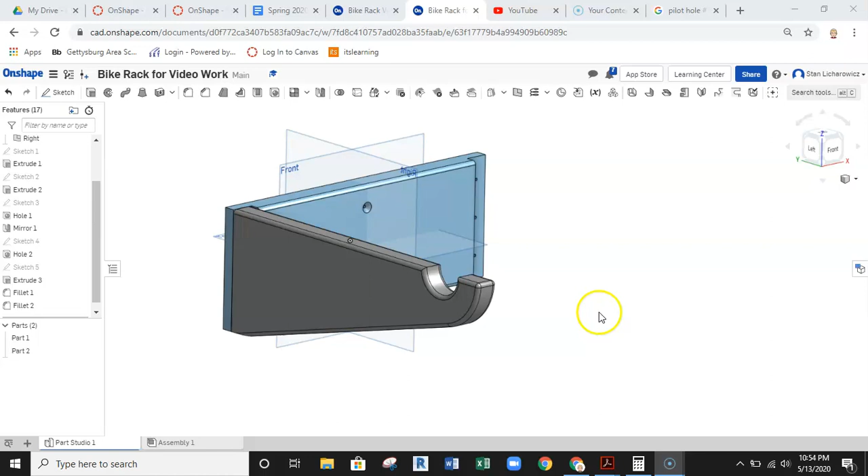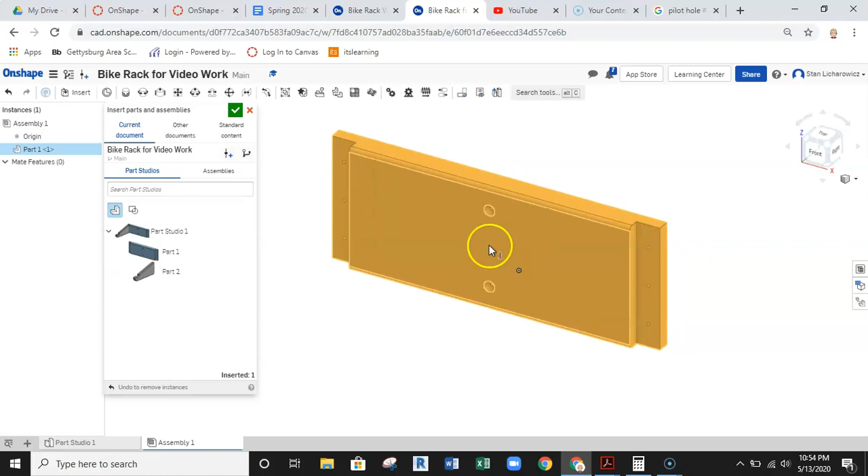Now what we can do in this portion of the assembly is jump into the assembly environment. From Part Studio, we'll jump over to the assembly, and I'm going to go up to Insert Parts. I want to insert Part 1, the back plate, and drop that into the assembly area. Then I'll grab Part 2 and drop that in also. Go ahead and hit the green check.

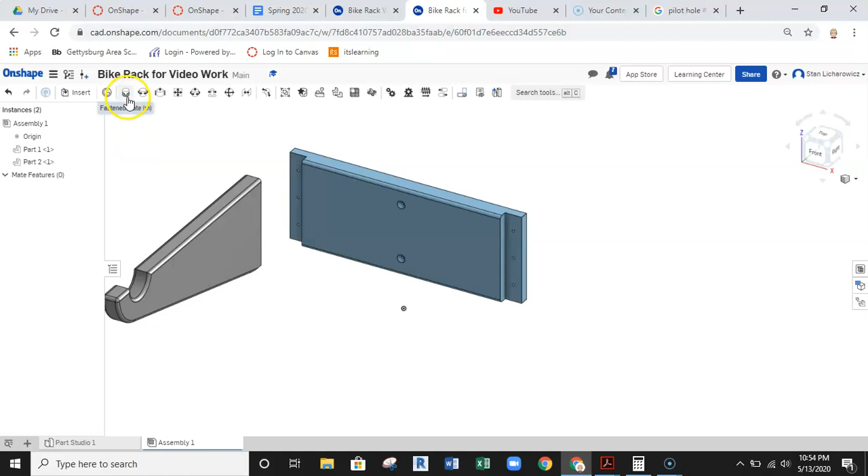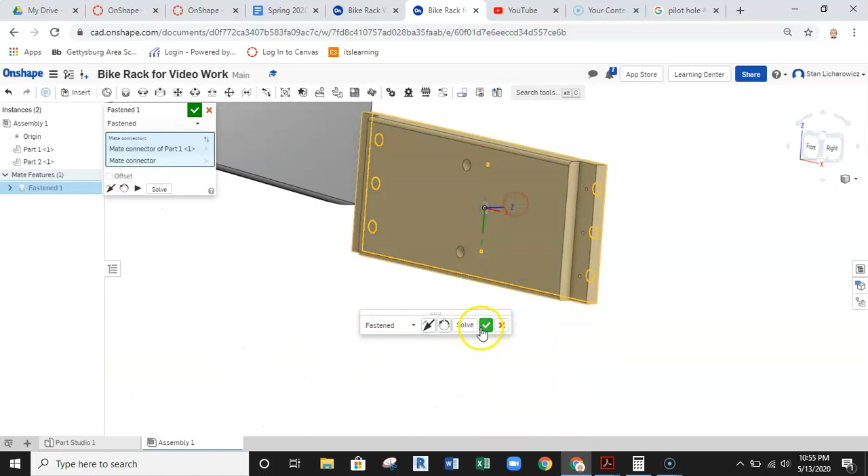Now I want to anchor this so things aren't floating all over the place. I like to find that center point and anchor to that, so I'll find the fasten constraint, spin this thing around, and find the back center of that part. I want to find a parallel surface to work with. Go ahead and select that, and it jumps and puts this into position so that when I set this to an isometric view, I know exactly what it's going to look like. So when I get into doing the exploded views and the rest, it's all going to work perfectly.

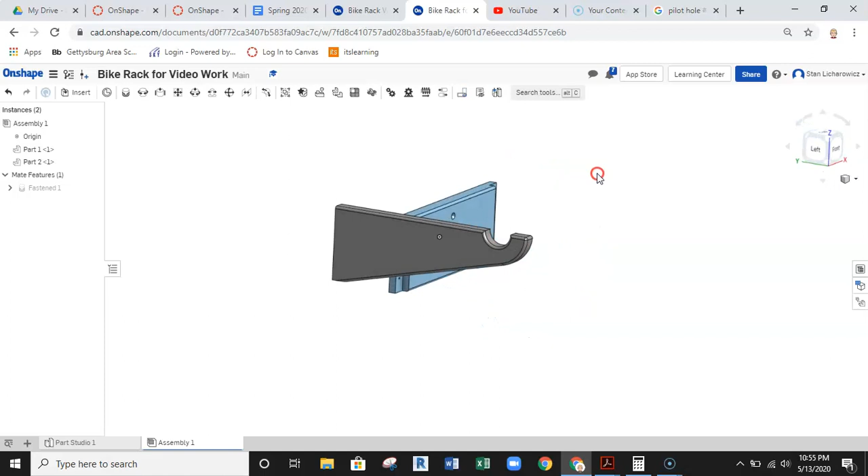With that set up, the next thing I can do is start adding the rest of the parts to this assembly. I want to start adding this arm to the back plate. You want to look and see how this fits together - it should be flush with the bottom and the top, and this arm should seat itself, so this corner should seat into this corner here, into the shoulder.

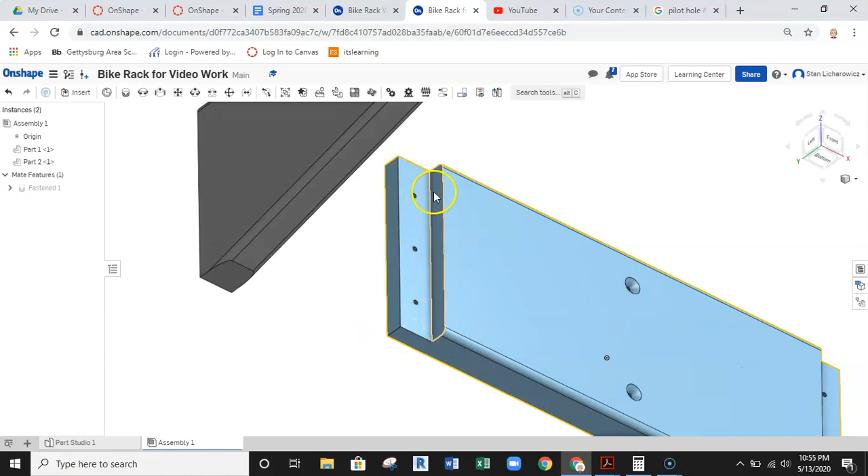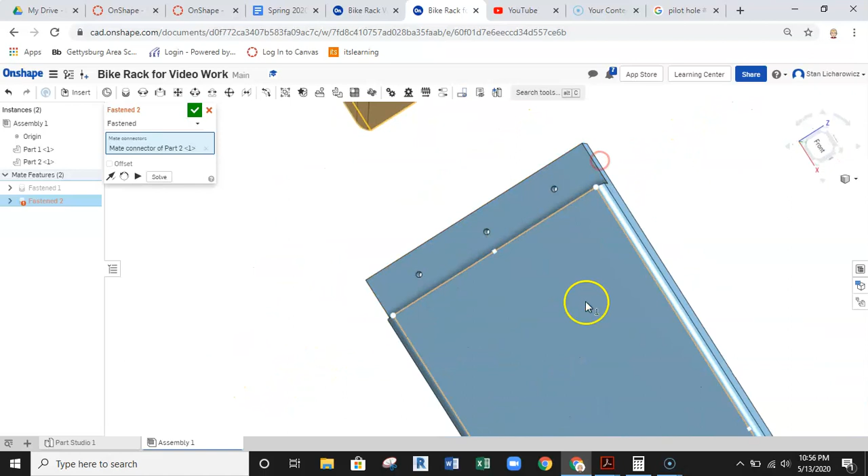So we'll grab that mate constraint, and I'll see if I can grab that point here, or we can also use the back center point - either one should work out just fine. I'll grab that back center point, flip this around, and find the center point of that area. Once I put this all into position, you can see things get really flush quick and fast. It's easy to put things together. Definitely kudos to OnShape for the fast and easy assembly constraints here.

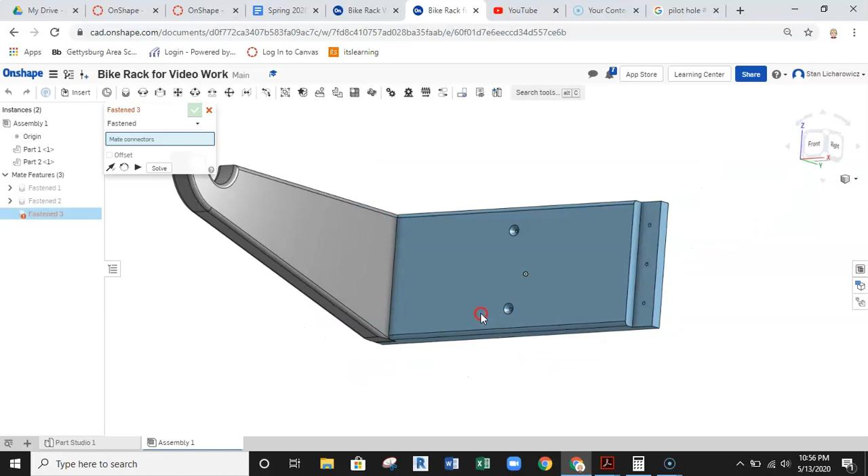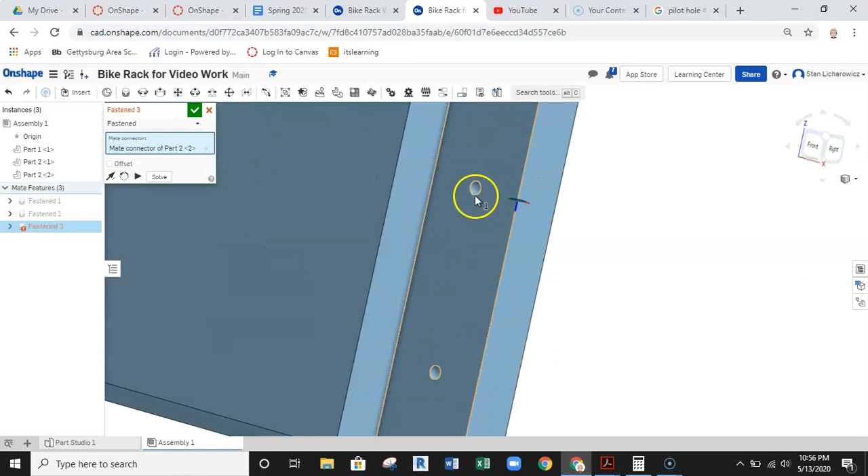With that done, the first arm is in position. Now I can go ahead and grab my second arm here. We'll grab the same part and do the same exact thing again - grab my constraint, zoom into the back of this, wait till it finds it, grab the back center, spin this thing around, and grab center. It jumps and slaps it into position, and we're all set and ready to go. So we'll accept those two constraints.

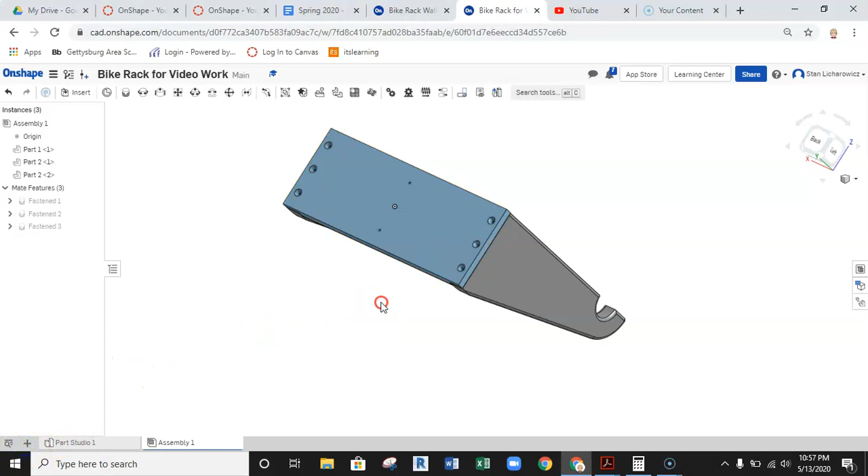Now we'll start talking about fasteners and adding our third different part into our holes in the back. What I found to work best here with OnShape, and with other CAD programs as well, is to go right out to the internet and search for fasteners from a supply house.

McMaster Carr has really been my go-to supply house for some time now. McMaster Carr generally gives CAD images that are either AutoCAD files, also available in different file formats, but step formats, so that they can be solid models also. So I want to go in here and search for drywall screws, and things pop up pretty quick and easy. I'm really looking for a simple high hold screw joining drywall to wood. This is probably a pretty standard application for a bike rack to be installed.

So, high hold screws joining drywall to wood. I'm not really joining drywall, but drywall screws are used for so many different applications. So here's your 2 1/4. I'm going to grab that. Here's a high hold screw, drywall number 6, 2 1/4 long. That's the screw I want to use.

This product detail tab, that's the button I really want to grab next. After I grab that, I can slide down through here. It's a Phillips head, I know that. But I come down here, this is what I really want to see.

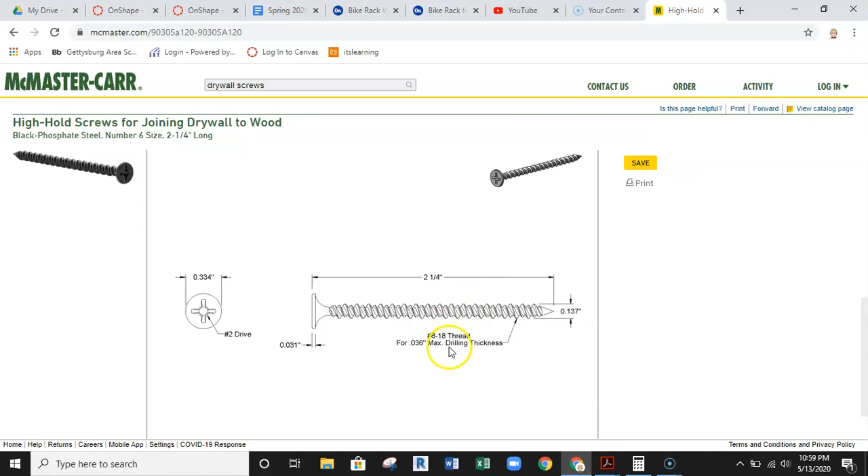So that's the one I want. Now what I'm going to do is pull this down, and you can see you can pull all these different models. What I found to work best is just this step model, and then I save. So I save this out to my computer, and then I want to upload that file into OnShape.

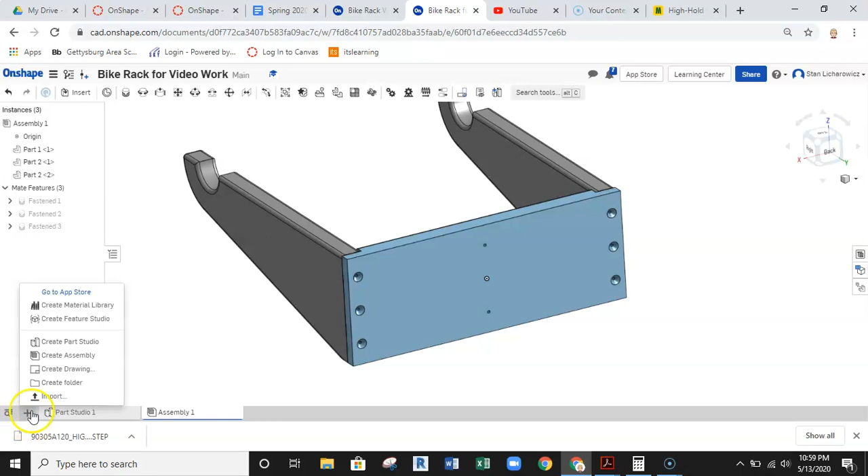So I'm going to jump back in here, and I need to go to the little plus button over here where it says import, and go ahead and hit import. Then I find what was just downloaded. This is my download folder, and there it is, high hold screws for joining drywall to wood. Grab that, hit open, and it's going to allow me to import to OnShape. Import to this document, combined to a single part studio. We'll go ahead and hit import to this document and hit OK.

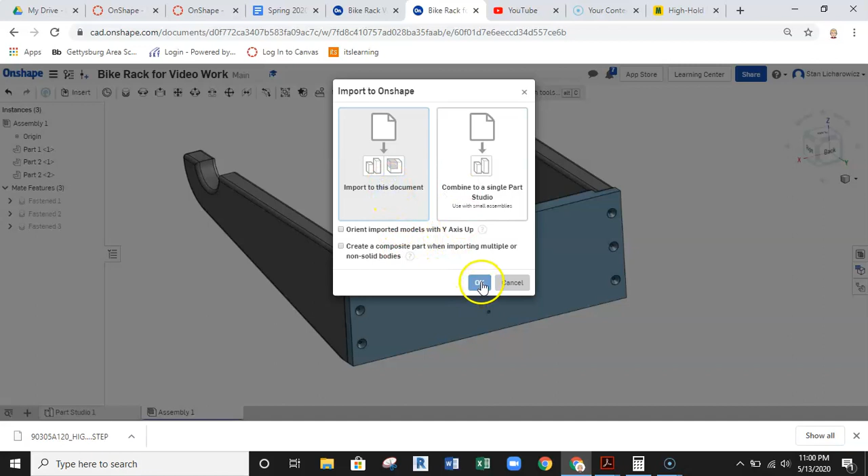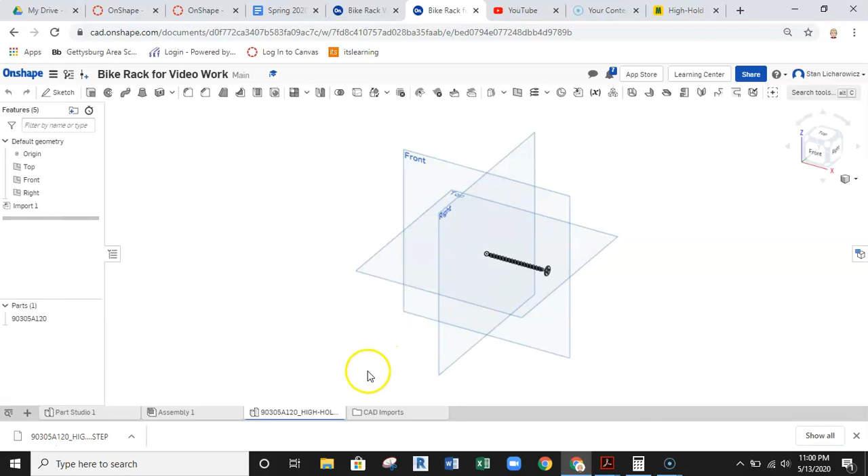All right, so it's giving me a notification here. That's all good, and I can close these notifications, close that up, and I can come down and see at the bottom of the screen, well, here's the screw. It should pop up here shortly. It's working, there it is. So there's the drywall screw that I'm going to utilize, okay.

So going to my assembly right now, and then I want to go to my insert tab and come up here and grab my drywall screw. So I put this into the drawing, and now I'm ready to start adding these to the particular hole. So close this out and take a look at this drywall screw.

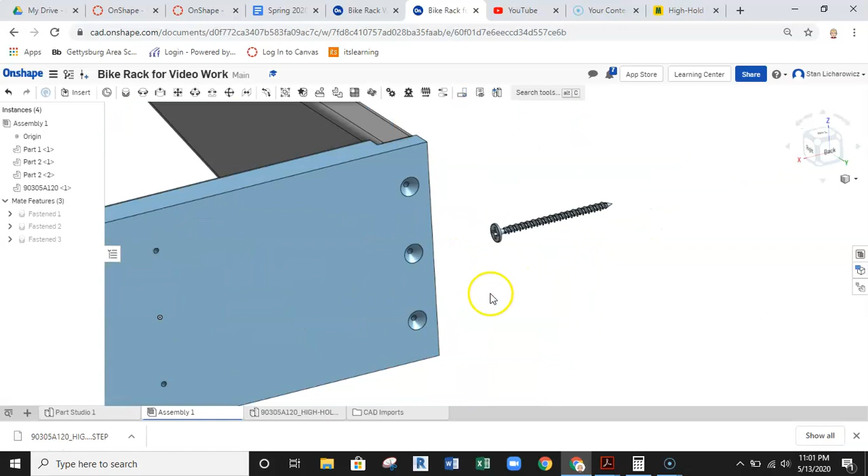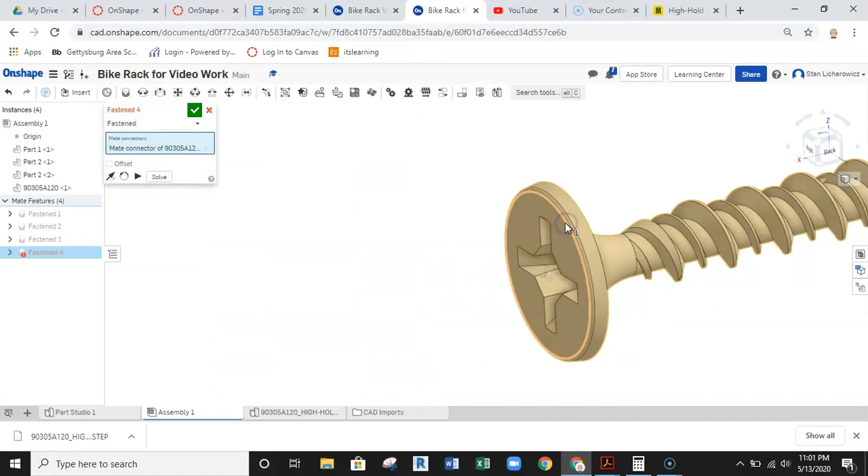All right, that's all fine and good. And probably, since this isn't going to move, this is going to be a stagnant drawing file. I can actually probably just mate this thing because I want it to be flush with the top of that countersink. So I'm going to grab my fasten tool, grab the top ring of the Phillips, and then grab the top ring of my fastener hole. That is a really quick, fast way to go ahead and insert.

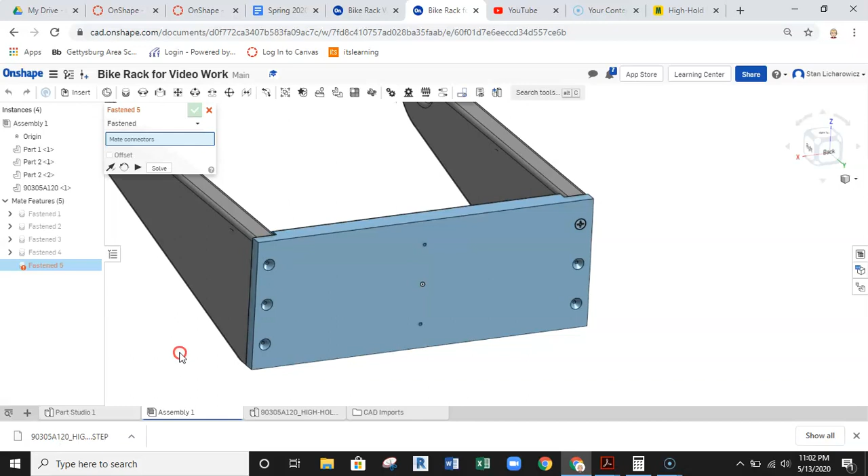Since it's not coming in, it's not coming out, I'm really not checking interference right now. This would be a really quick way to create and install all of your fasteners. So we'll go ahead and grab the rest of these things, because we're going to need a few of these in here now. That's 4, 5. That's all of them, okay.

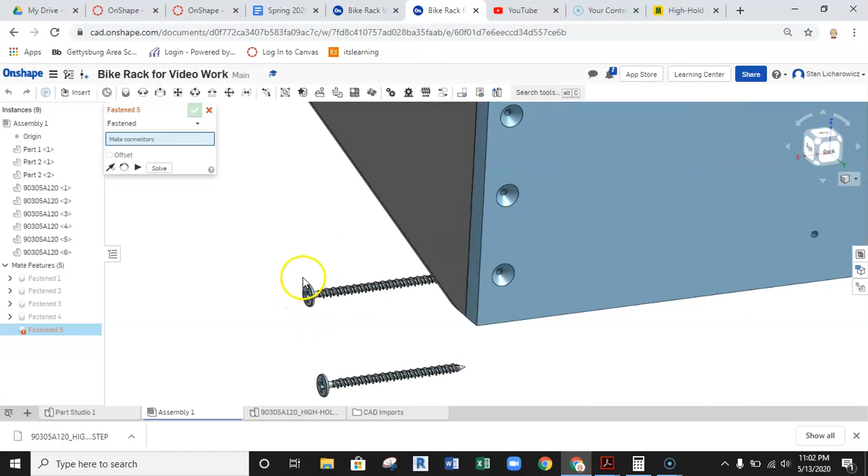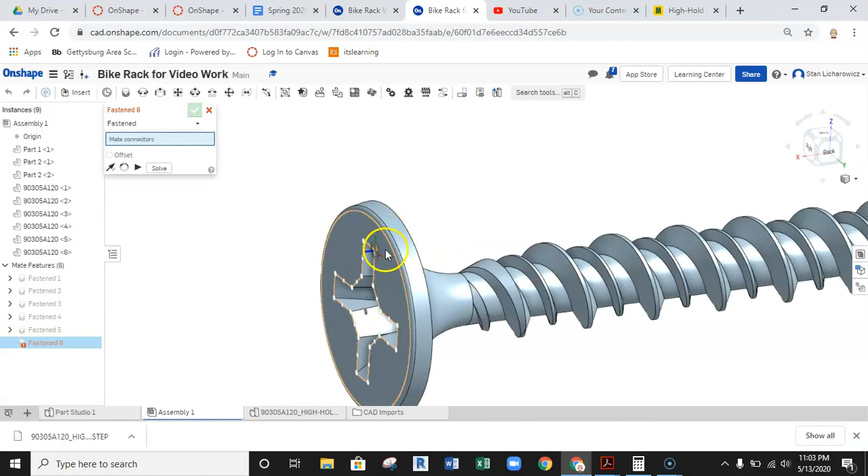And now we just start mating them up. So we'll go ahead and mate that top ring to ring. That's good. And then we'll run around this drawing like so. Whoops, don't do that, that one didn't go right. Clicking too quickly here. So we'll go ahead and grab, and make sure that little glyph shows up there on the center. That's important. And then we'll drop that there. Okay.

All right, pause the video, got the rest of those put in place. You can see that I have them all there now. And now we're ready to go ahead and set up, here's my isometric view.

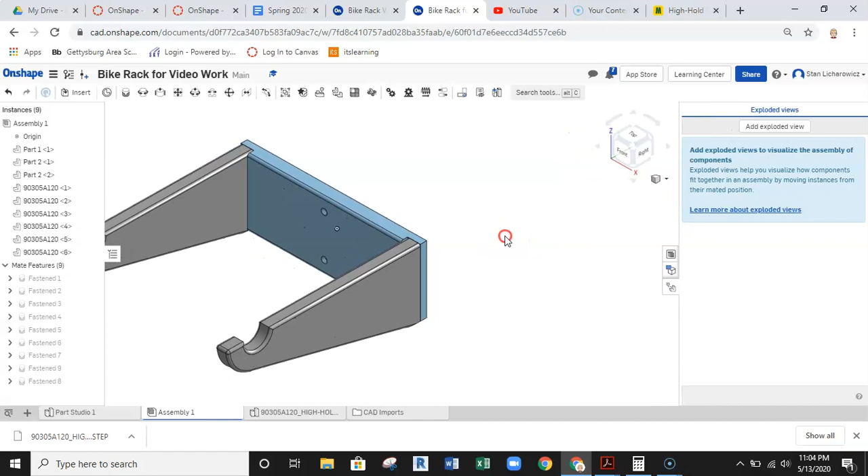We're ready to set up the exploded view. So to do that, we're going to grab this tab over here. That opens up our exploded view drawing area. Now we can start pulling our parts apart here. We're going to add an exploded view, and the first thing I want to do is start selecting the parts to move.

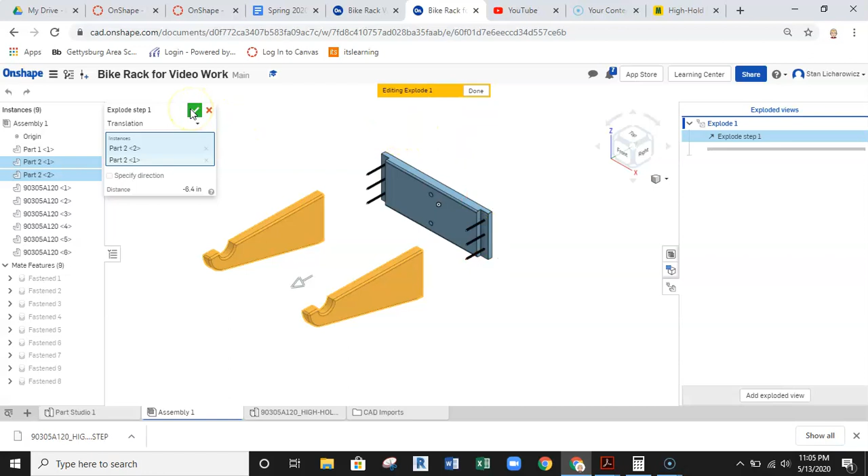So I actually want to move both of these at the same time. I select them, grab the arrow that I want to move, and then I just want to make sure things do not overlap. That is the key. Things should not overlap in an exploded view drawing. So with that set up, they're in a good position.

So I can go ahead and select the remaining screws here, and then I can just move this and pull these out the back. So they're coming out the back. Those are in a great position. And so now this exploded view is finished. These are quick and fast.

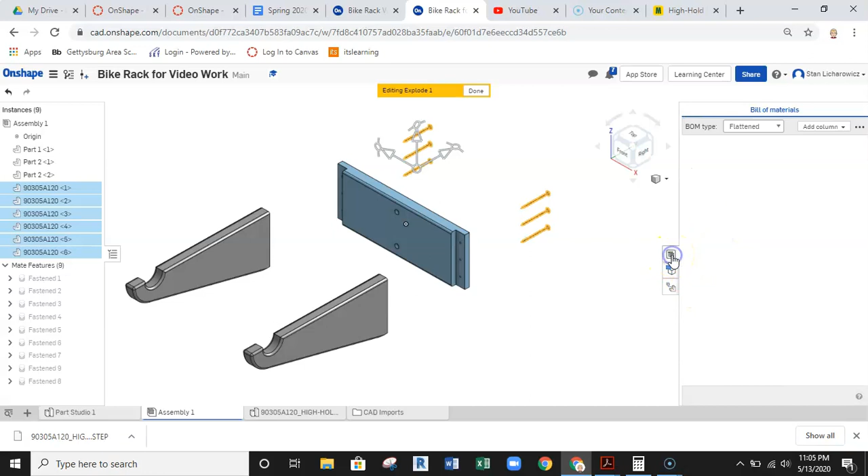Before I exit this exploded view, what I'm going to do is I want to go ahead and set up my bill of materials. Now, some things that we want to do here with the bill of materials is we want to make sure we have item number, quantity, part number, and a description.

So description I don't necessarily need. I want to get rid of description, remove that from the column. Part number, I don't need part number either, remove that. Let's go ahead and add back in though, let's add in the name of the part, and let's also add in the material for the part, because we're going to want to know some information about those.

Then we'll have to talk about, well, where do we go to get this material to show up? Because right now it's showing none, none, none. Well, obviously there is. And then how do we get these renamed? So we'll go take care of that now.

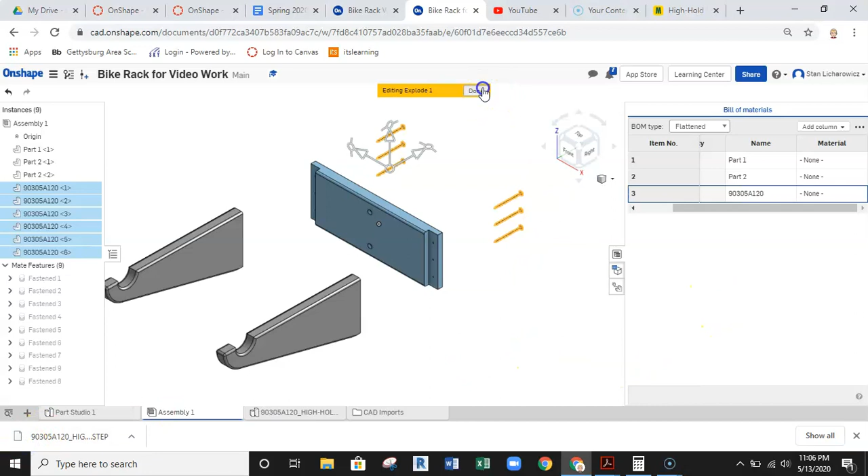All right, so we'll hit done here, finish up that exploded view. And let's jump back here to the Part Studio. This is where we can go ahead and actually name our parts now.

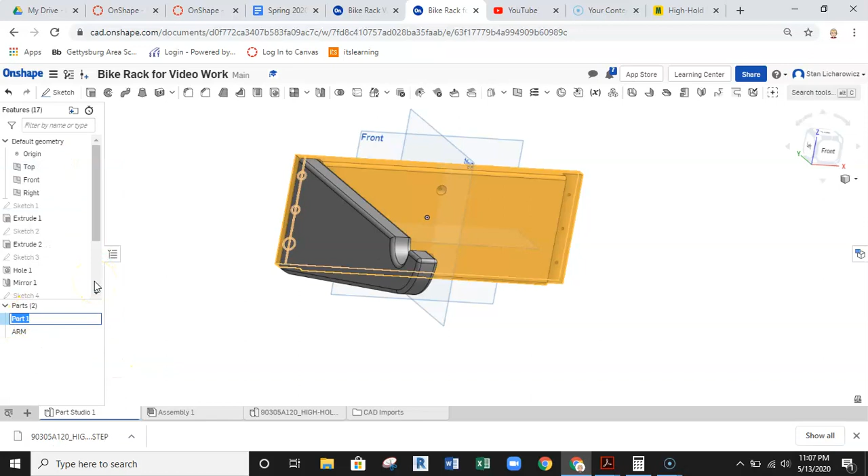So this is the arm. I'm going to right click on that, come up here to rename, and we'll call this arm. All right, that's done. Then we're going to come here, right click, oops, got both selected there. Right click and rename, and we'll call this wall plate. There we go. So now we have the wall plate and the arm.

We can go into the assembly, and then we should be able to come over here, and you can see there's the name for wall plate and arm. Okay, and you can still see that that screw here is not changed.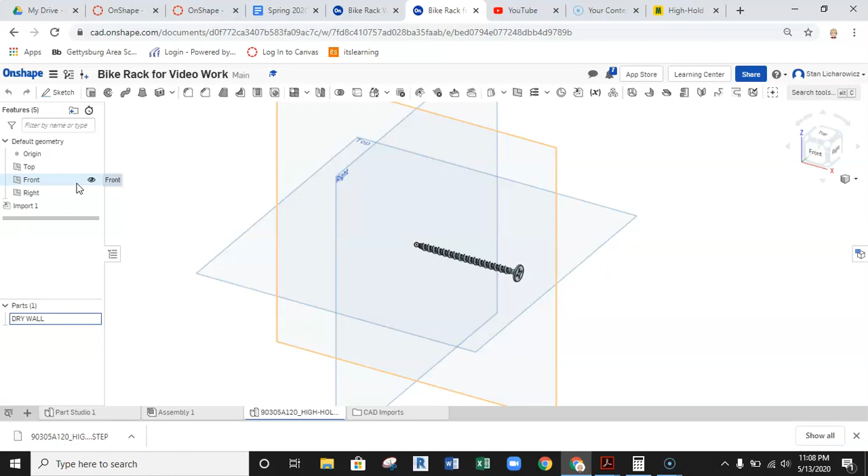We're going to go and change that now. So here, we'll select that file, and there's the part over here. We'll right click on that, and we'll rename this as drywall screw. And then we'll jump back into the assembly, and we can see that that updates. So that's all good. So now let's get our material worked out.

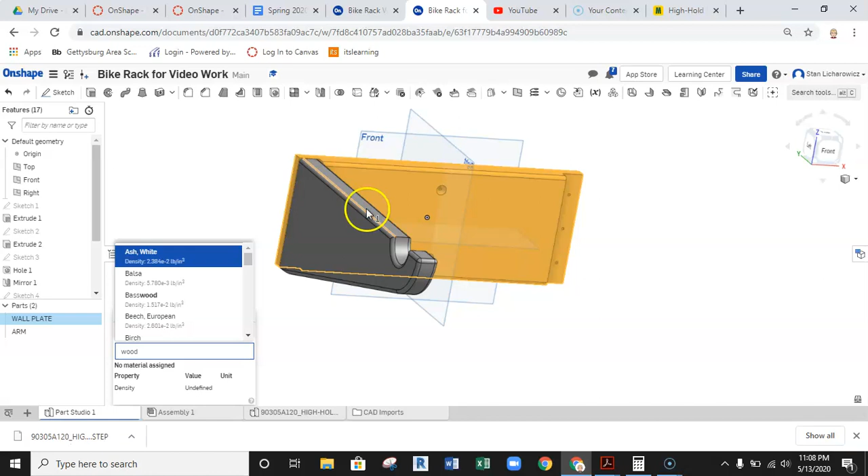Back to our part studio, same thing, right click on the part, and we should be able to find assign material. There it is. And since this is going to be made out of wood, type in wood and just grab some birch for that. Good.

And the same thing here, we'll do, got them both selected again, and we will right click, assign material. There it is, and wood, and we'll call that birch also.

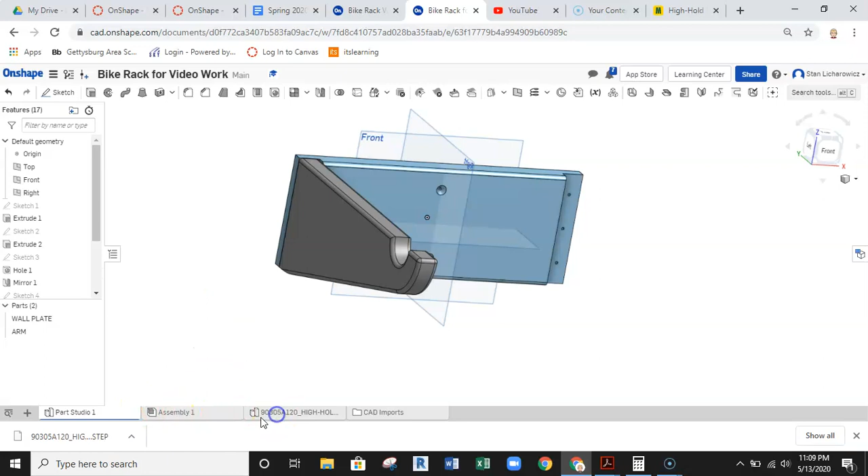All right, good. So we'll jump into here, this drywall screw, we'll get that a material. That's going to be steel. So there's a ton of different steels, so we're just going to find, not stainless steel, we'll just use steel.

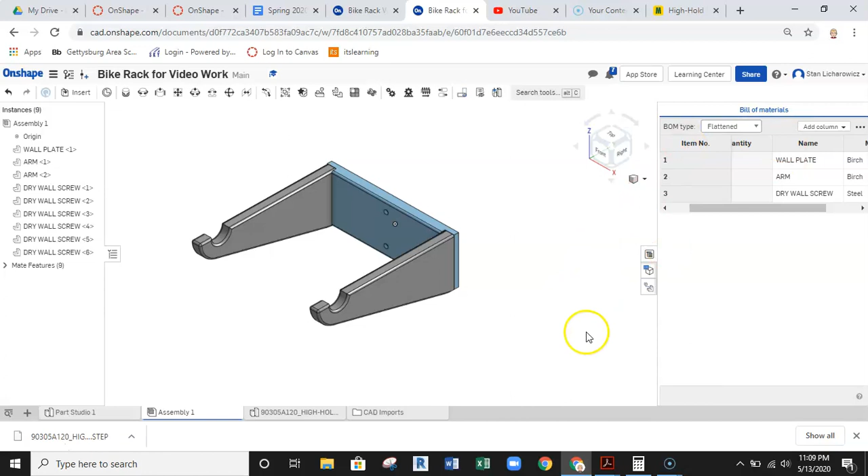Okay, so now when we go back to the assembly, we should have, there we are, we got material, we have a name, that's all good to go. So when we actually set up our multi-view drawing, that'll show up. Okay, so I believe we're pretty well set to start putting drawings together from all of our modeling.